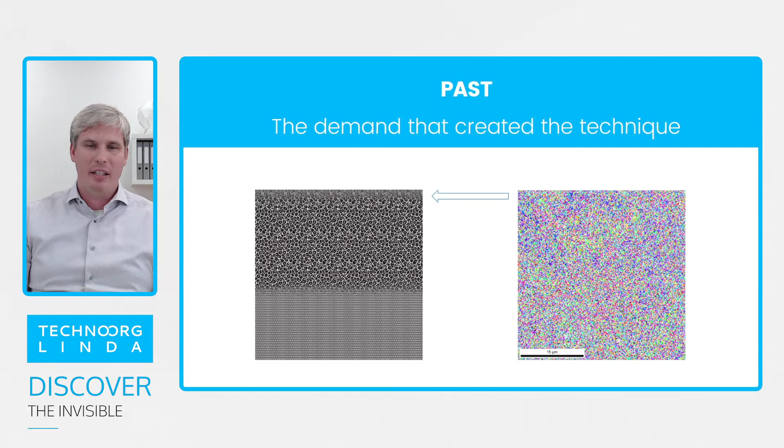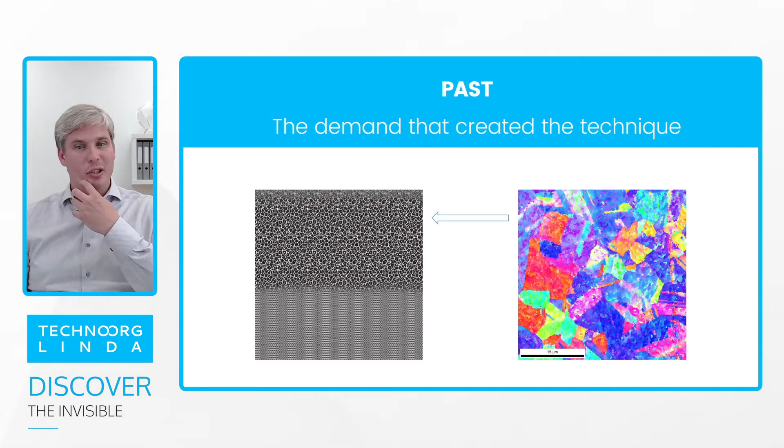Of course, the finest steps of mechanical preparation or other techniques can remove a part of it, but still some amorphous will remain on the surface. The bigger problem is that below this surface there will be a crystallic structure where you can get some information, but it's very important to understand that usually this structure is deformed, destroyed. The orientation of the crystals were changed.

So actually this can lead you to a very dangerous point, and you may think that what you see is the reality, the original structure, what you're looking for, but it's not, it's definitely not. So that layer must be removed somehow, and here the mechanical polishing is just not enough, or any kind of technique what you may use. So you see that if you reach the region where you have the original properties of the sample, it looks totally different.

So in the late 70s and early 80s, a new possibility came, named ion beam milling. Actually, that was a great idea, and was a very, very important and useful step made by our noble competitor, Gatan. Gatan is an American brand, and their first ion mill was the first and only one at that time, I would say, the duo mill. What helped the scientists with this new possibility, and it helped to remove a part of this amorphous or destroyed layer.

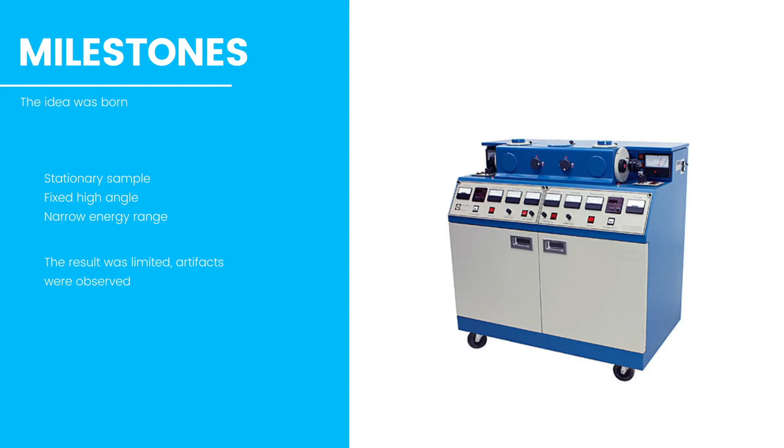The idea was great, and it was a really significant step, but there were some limitations, what needed to be upgraded, needed to be solved. For example, the samples were stationary, and that was actually a bigger problem than it seems to be, because moving the sample can help to avoid many artifacts

what you may see on the surface. Also, the angle of the treatment was fixed around 15 or 20 degrees, and actually the ion source was a great tool that time, but the energy range where you could adjust the accelerating voltage was really narrow. So basically it was capable for the bombarding of the sample with the high energy argon ions. And the high energy ion milling causes also some damage on the layer.

So something was needed. And in that time, a Hungarian team came from the Academy of Sciences, Hungary, and also some researchers from the Technoorg GMK, was the pre-company of Technoorg Linda. And this scientific group invented some new technology and new tricks what helped a lot to reach the desired level of these samples. The first step was a new ion source. It was the first electrostatic ion source, and it's operated between 2 kilo electron volt and 10 kilo electron volt. Basically, the whole range was very useful, and from that time you had the possibility to go a little bit to the lower range of energy and have a little bit smoother surface. But another step was helped a lot.

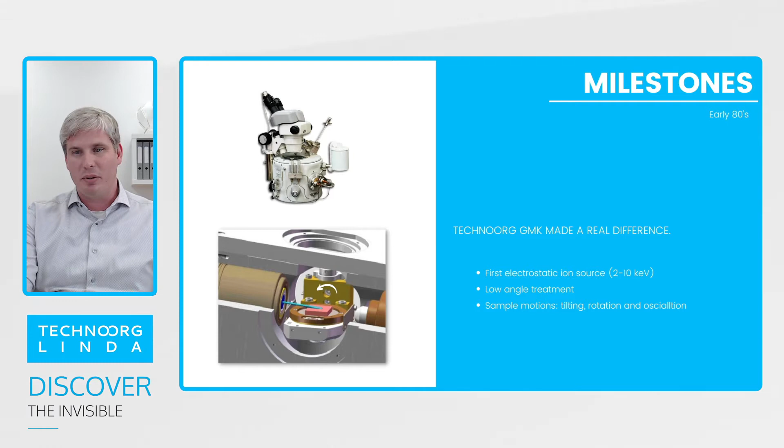And in 1996, a new invention came, the first low energy, the first dedicated low energy ion source on the market, from the team of Technoorg Linda, Hungary. That ion source operated below 2 keV, and in high vacuum circumstances, even the 20 or 30 electron volts can be used, for example in Auger systems. But in normal mid-vacuum, usually we go down until 100, 200 electron volts. But it's a great tool for cleaning those amorphous and damaged layers caused by any previous steps of preparation, including the high energy ion bombardment.

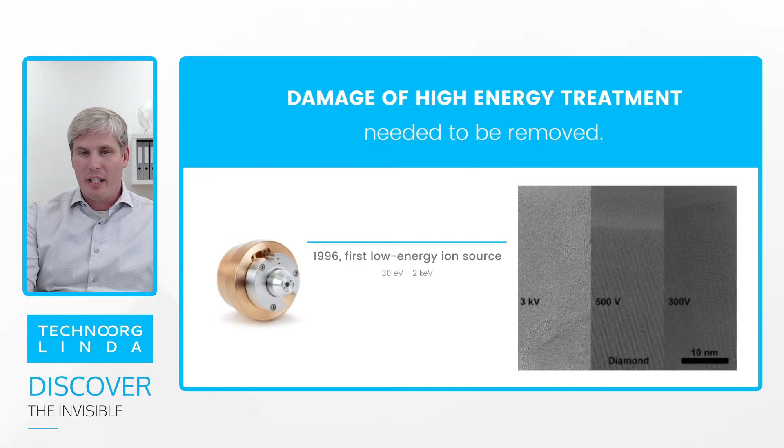You can see on the screen the difference between the high energy and low energy steps. Thanks to this new ion source, in 1999 at the University of California, Berkeley, there was a silicon monocrystal sample prepared by the scientific group at Berkeley.

That was the first atomic resolution image ever made in the world. I would say this new possibility, the low energy ion source, opened the door to the world of atomic structures, and from that point the scientific community had the possibility to see these atomic structures, not just imagine how they should look. That was a great milestone, and definitely a very big step.

The IV4 was the first machine that contained the low energy and high energy gun together. So basically that was the first device that could cover the whole range of this preparation line, from the very first step until the finishing cleaning.

Another great invention was the gentle mill. It was a purpose-made machine for final cleaning of pre-prepared TEM samples, or final cleaning of FIB lamellas. Actually, the biggest point here was that the gentle mill was the first device that was computer controlled, giving you the capability and possibility of using recipes.

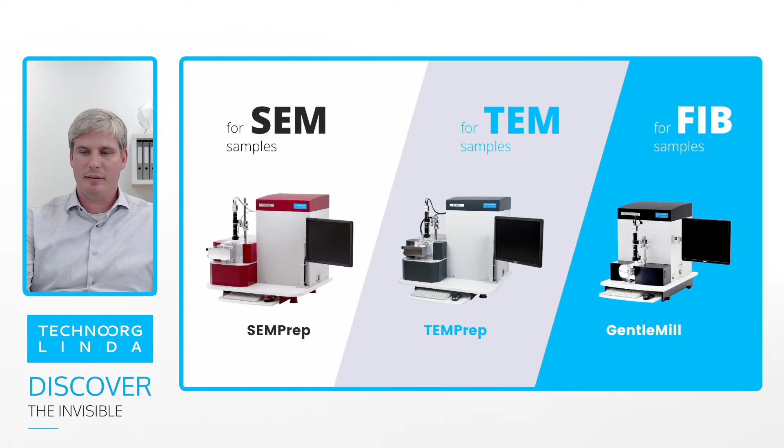Right, we're here, we are in the present. Let's see what kind of possibilities this technology can offer to users. The main part of the technology is the same, even if you want to use it for TEM or SEM applications, but the design of some parts are totally different and optimized for those purposes. That's why we have a dedicated product line for SEM and EBSD samples, other tools for TEM preparation, and purpose-made machines for final cleaning the FIB lamellas. Let's see the SEM field first.

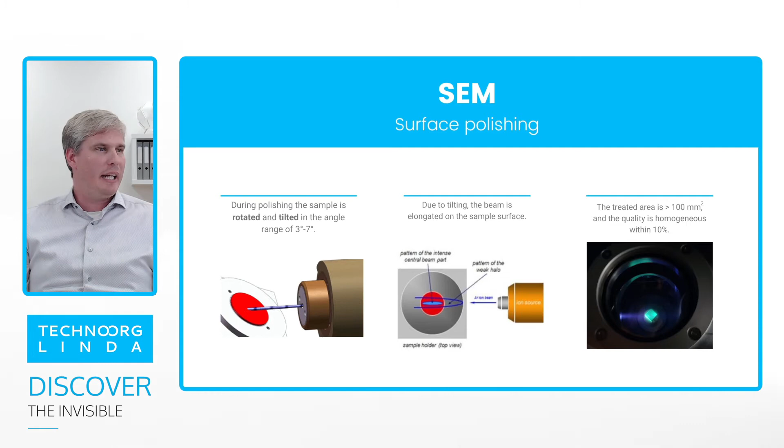We can choose from two different approaches. One is surface polishing, when you want to clean the original surface of the sample. Here you use a shallow angle, usually between 3 and 7 degrees. Because of the shallow angle, the beam will be elongated on the surface, and during rotation of the sample you can reach a relatively large area that will be cleaned to the highest level. That ultimate quality area can be around 1 square centimeter or even larger.

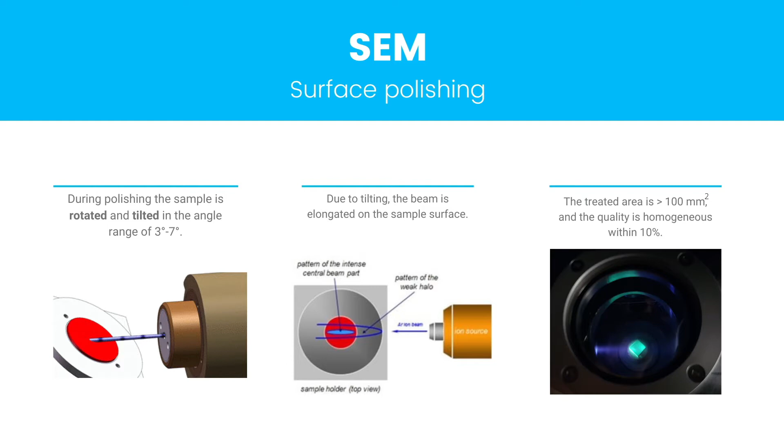We designed different types of sample holders to meet the needs of different applications. Sometimes you have large samples you want to prepare. Here you can use the flat head type sample holder, or a standard type one where you can use your pin mounts from the SEM, the small or even the large standard pin mount holders. We also have specially designed sample holders for samples embedded in resin.

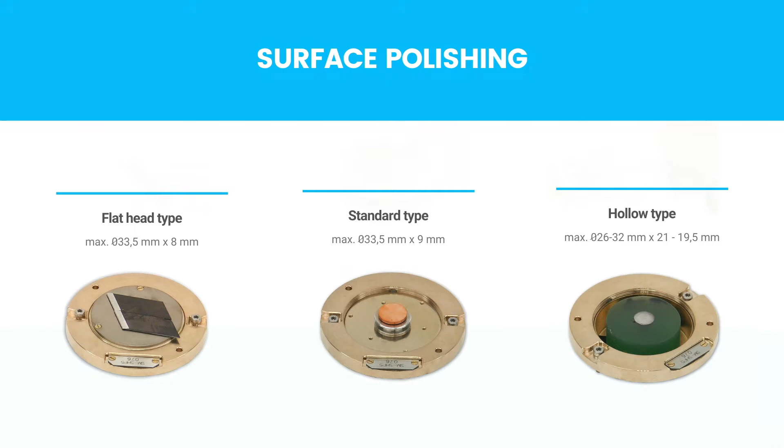The other approach, the next one, is the slope cut or cross-sectioning. Here you have a tilted sample and you cover one part of the sample with a mask. In our case it's a titanium mask, and just next to the mask you cut into the sample and make a new surface that is absolutely ready for any kind of observation.

Here we offer 30, 45 and 90 degree sample holders. All of them have advantages and also disadvantages. It's up to you which sample holder you want to use.

Usually we offer the 30 degree sample holder for bulk materials where the exact place you want to cut the sample is not important. The 90 degree has other advantages. It makes a real slope, a real cross section, and in case of heat sensitive samples it can add some other advantages as well.

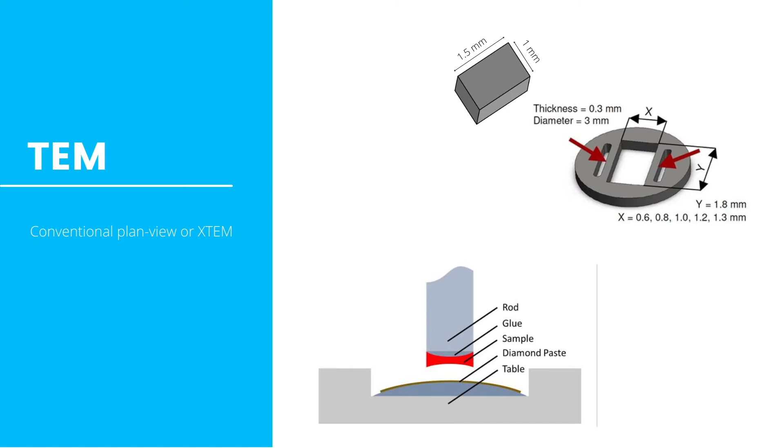In case of conventional transmission electron microscopy sample preparation, usually we have a small piece of material that should be encapsulated in a titanium grid. This is the way we do it. And then, together with these titanium discs, you can polish it mechanically until a certain point.

Then you can choose between single or double-sided sample holders, depending on your aim. The single-sided holder gives you more chance for lowering the angle until almost zero, which in some dedicated and delicate cases can be needed.

The double-sided holder gives you the chance to use the recipe-based operation mode in the machine, and the whole procedure can be done by the computer, because both sides of the sample should be treated. So in case of the single-sided holder, you need to flip it over by hand. The double-sided holder can turn over automatically. After a good preparation, you can reach the ultimate result without any kind of damaged or amorphous layer.

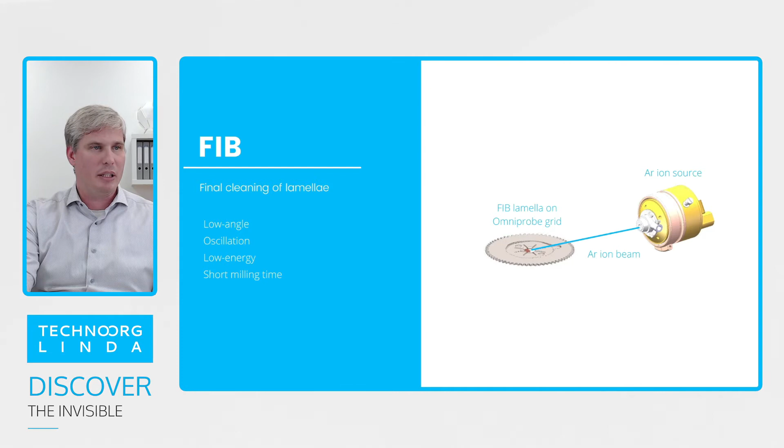This is one way. The other one, maybe nowadays the more popular one, uses a focused ion beam, a FIB, for cutting out a lamella, and then you clean that lamella and remove the last part of the amorphous layer. Usually our operators use OmniProbe grids to fix the lamella, which can be put into our sample holders. Using low energy argon ions, you can remove all the amorphous layers.

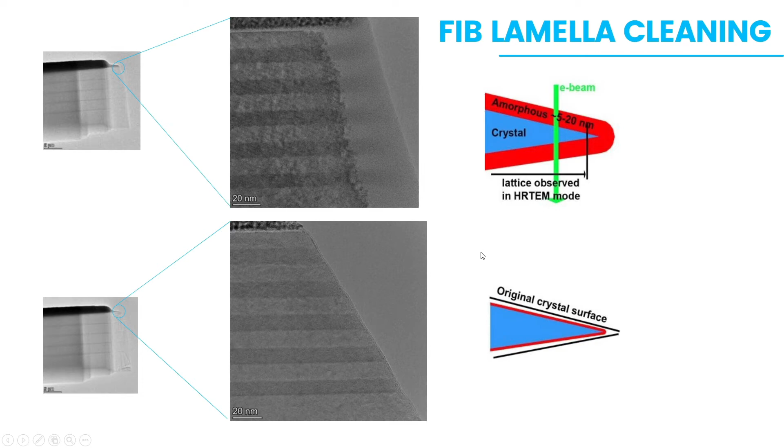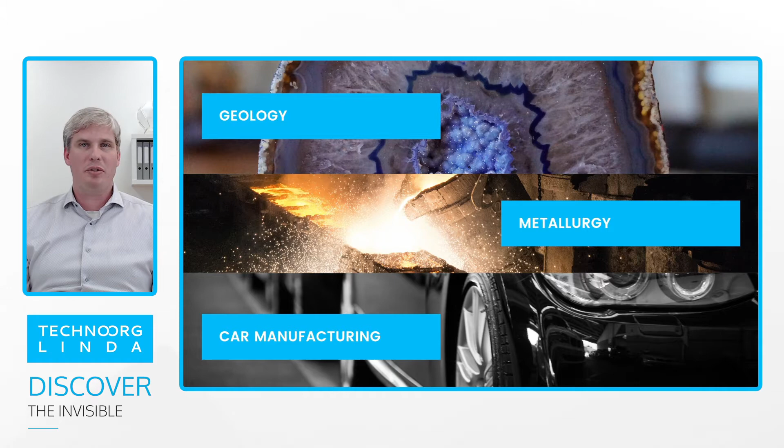These are the approaches and the possibilities, but let's take a look at the typical applications. Actually there are many, so we will choose some just to give you a picture of what kind of usage can be real. Metallurgy is one of the major applications.

Any kind of metals, including soft and hard types, can be easily prepared with argon ions. Here you can see aluminum sheets, but iron or even titanium can be prepared easily, especially if you choose the right configuration of the machine, because we have a dedicated ultra high energy ion source that can speed up the cutting in case of really hard materials like titanium.

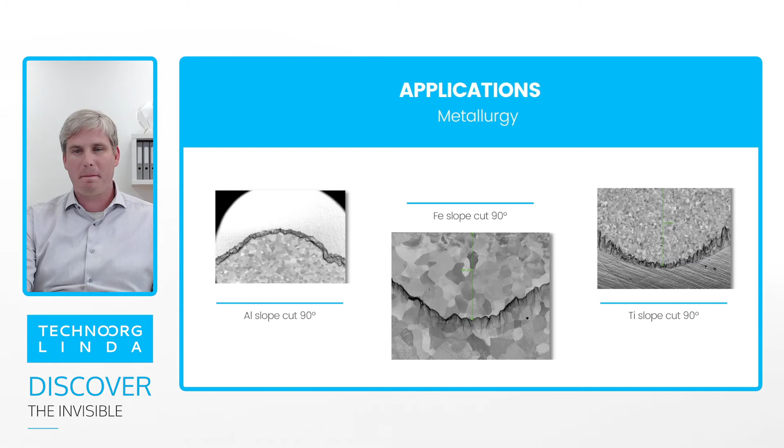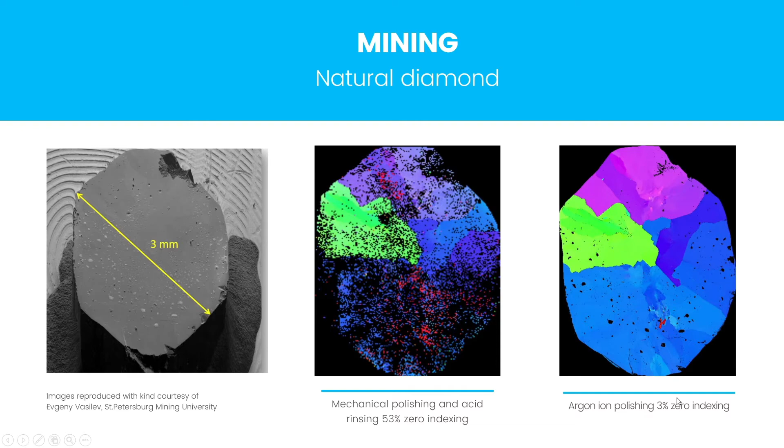But after some minutes of ion milling, actually 100% of the area was indexed. You see 3% of zero indexing here, but that's because there are holes in the sample. So where you have no material, you have no signal, obviously, but all the other parts were indexed, including every single area of that sample.

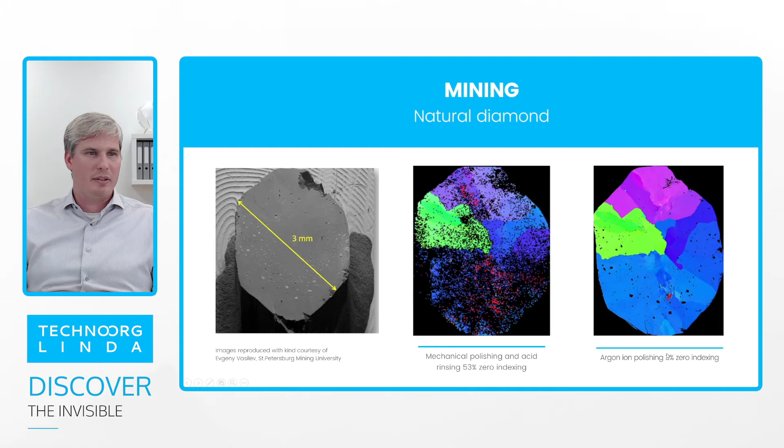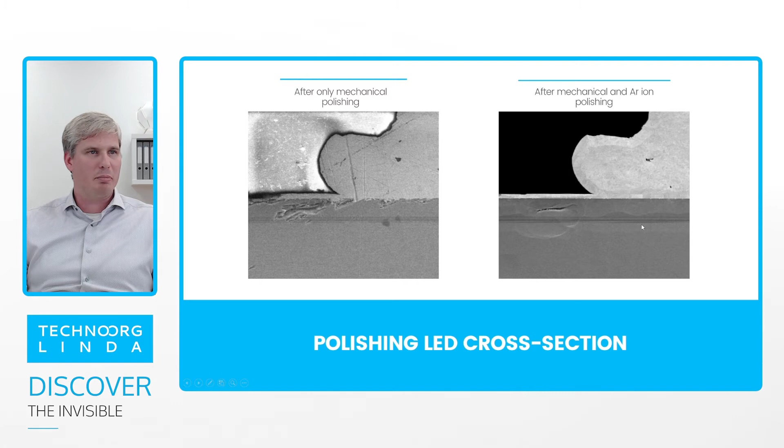Some other samples from electronics - this is an LED cross-section. Here you can see a multi-layer part, probably a mirror. This was the area of interest, but after mechanical polishing, that was the finest result they could achieve. So they tried some minutes, 10 or 12 minutes of preparation by the ion beam, and that was the result. That was the difference between the two results. It's quite obvious - even the smallest details can be measured. Here you see.

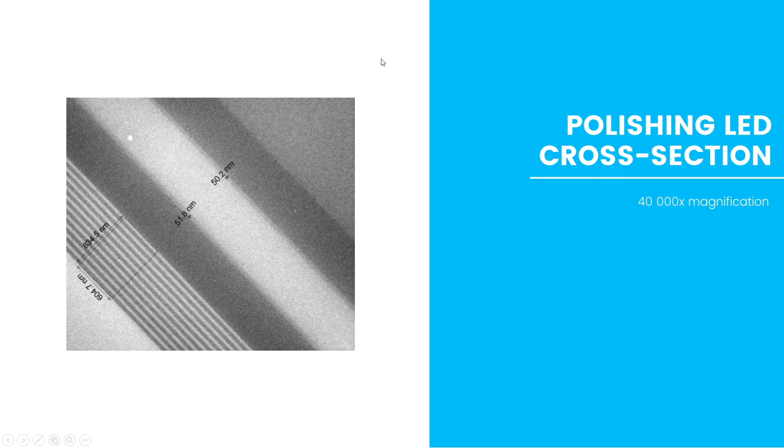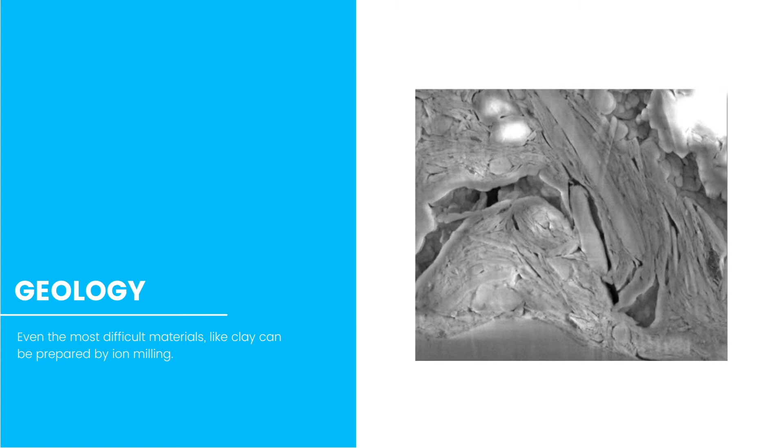A nice example from the territory of geology. Actually, geologists have great and very tricky samples usually. We really like them because this is an area where we need to find new tricks and new approaches. It's a great feeling when we can solve these problems.

Clay is definitely a very difficult sample. It's easy to imagine when you try to polish it mechanically how you will mix all the structures and all the parts and smash the whole thing. Cutting this clay sample with argon ions is probably the only way to open the inner part and see the original structure of it.

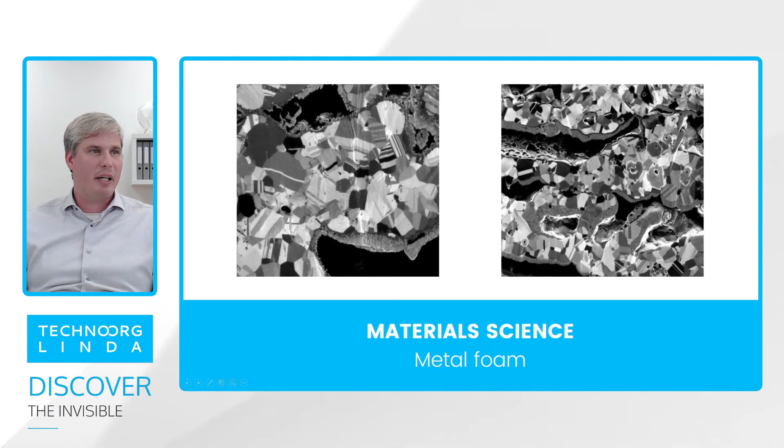Another delicate sample from material science application is a special metal foam containing copper, nickel and other alloys. Really sensitive structure, so it's quite easy to destroy it if you use any kind of mechanical treatment. But cutting it by argon ions gives you an absolutely great quality, ready for any kind of observation.

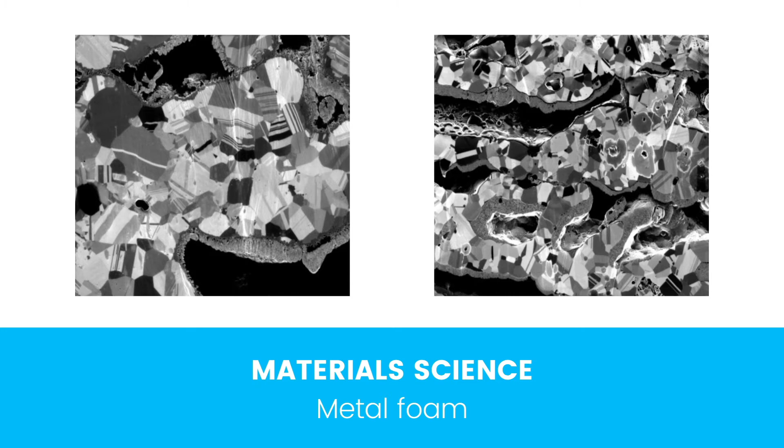You see that even if you have soft or hard materials, including delicate samples like metallic foams or other cases, argon ion milling is a material independent and very easy to use solution for those.

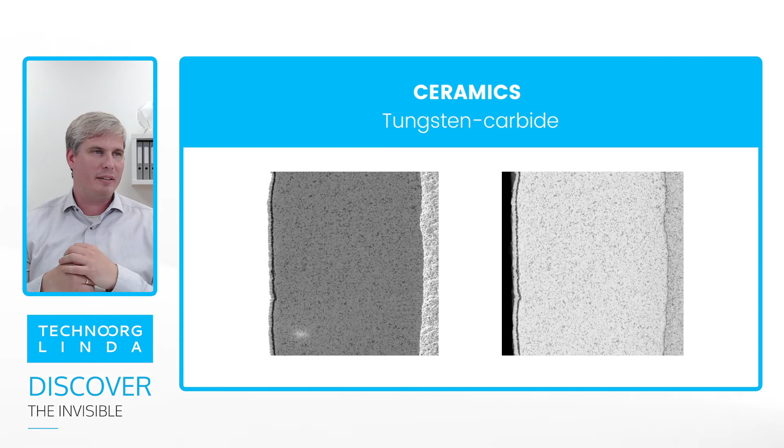But there are some special cases where you need some tricks - for example, if you have really hard and very soft materials together, like tungsten carbide and cobalt at the same time.

In case of any kind of polishing, including mechanical polishing or polishing the surface by argon ions, it's very easy to polish out all the soft parts before you even touch the hard areas. So something is needed to have a real useful sample. In these cases, the only good approach, the only possibility you have, is making a slope cut, because in that case the preparation will be done under zero degree, so the soft and the hard parts will be cut at the very same time.

So if you see the new surface, you can observe all the points, all the parts at the same time, without any kind of artifacts or remained damaged layers.

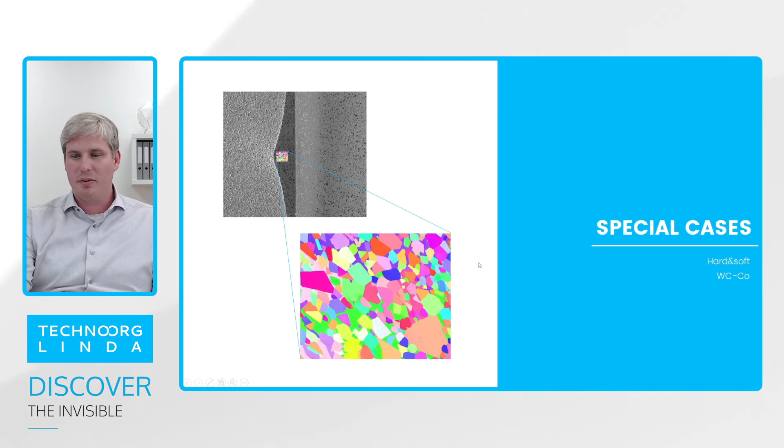It's a very similar case if you have a porous material like limestone in our case. Actually, it can be avoided to have such a rough surface if needed, but in many cases, for example in case of EBSD, you don't need to have a flat surface - you need to have a clean surface, but it's different. There are some tricks to make this leading edge more even, but we wanted to show you that even if you have that kind of rough surface, it can be clean enough to make a brilliant and clean EBSD image or any kind of observation.

There are some samples which are really heat sensitive, and it gives you another challenge, another problem to solve, because obviously you have different possibilities to cool down the sample. If it's really heat sensitive, usually use an effective liquid nitrogen cooling option, which can transfer the heat away from the sample.

That's great, but if your sample is not heat conductive, it's really difficult. Even if you have a very efficient cooling system, it's almost impossible to transfer the heat away from the point it was generated, namely the point where you hit the sample with the ion beam.

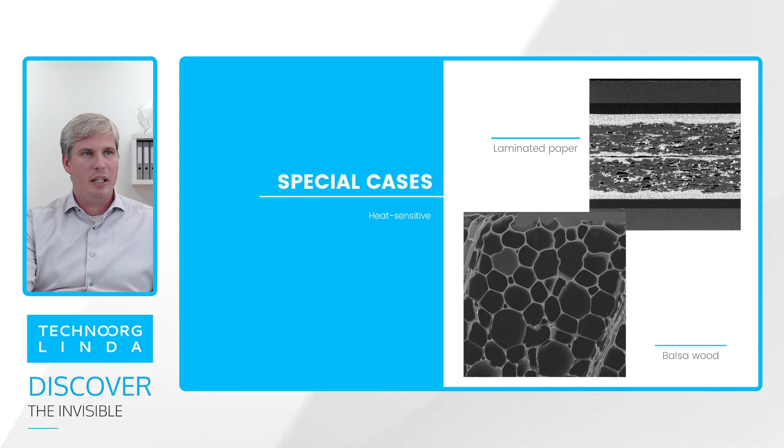The laminated paper is very similar, but you can see that a great result is achievable.

In other cases you want to protect your samples, for example when you have something that can be sensitive to oxidation. In these cases you can use our VTU technology. VTU means vacuum transfer unit. So the prepared sample can be transferred to the glove box, or in some cases directly to the microscope, by using our VTUs, closing it into the capsule and avoiding any kind of oxidation. It's up to you - you can use vacuum or any kind of protective gases. Usually we use argon, but it can be dry nitrogen or anything else you choose.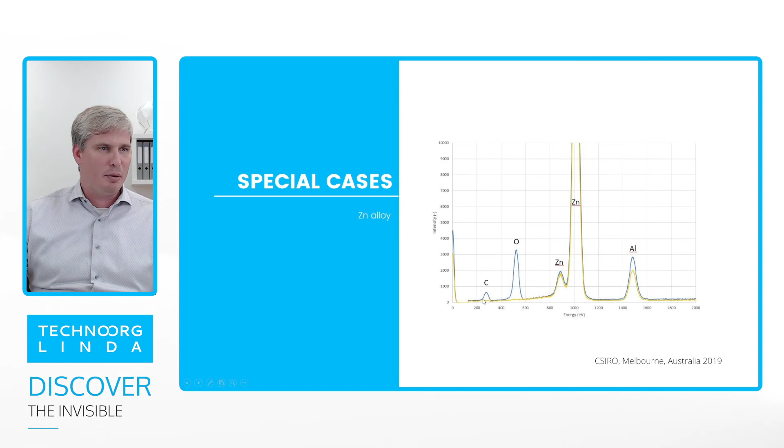Just to show you the difference between using or not using the VTU, there was a zinc alloy sample prepared by the group of CSIRO in Australia. Once they prepared it, but during the transportation they did not use the vacuum transfer unit, and you can see the oxygen peak here. Next time they prepared the same sample, but the transfer was done using the VTU, and you can see there was no additional oxygen and no oxide layer on the surface. Also you can avoid carbon contamination or any kind of unwanted material on the surface.

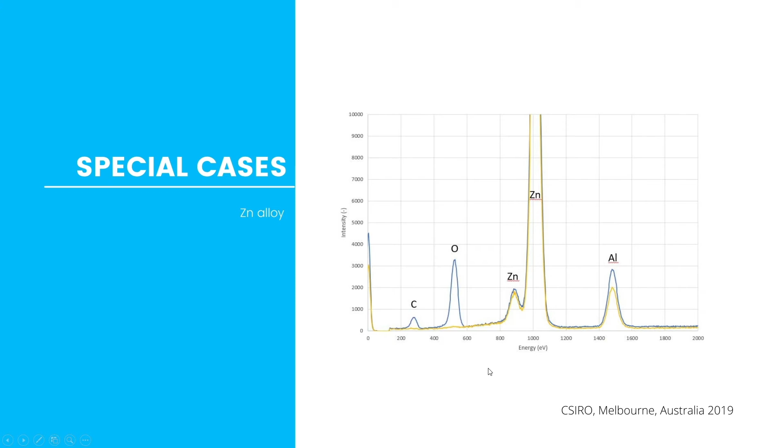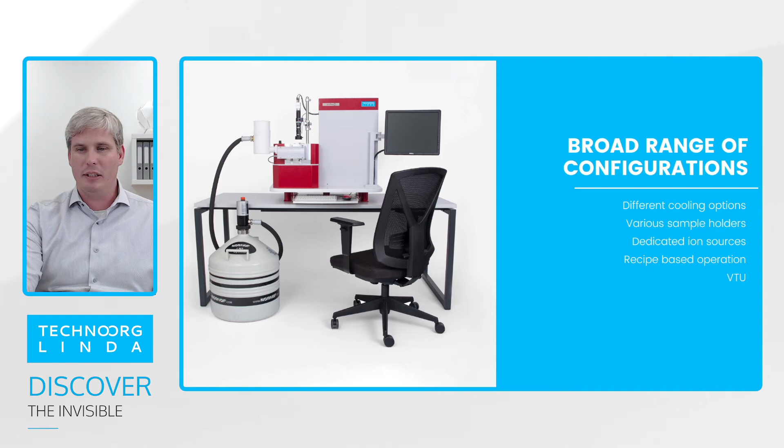Okay, so this is what the technology and our portfolio has right now, but what can be the future? Because what we see right now is that trained human power is more and more expensive and more useful, and that's a good way - we're happy to see that. But what it means is all the job that can be done by a computer or a device, it should be done by that device.

So an automated operation mode and a recipe-based operation mode can help a lot in day-to-day work. That's why we already have this option in our machines. But also remote control is another thing. Especially COVID has shown us how important it is to have such a device or technology that can be controlled from your home or a different location, because during the pandemic or any kind of troubled times, your research or your job will stop if you don't have these kinds of possibilities.